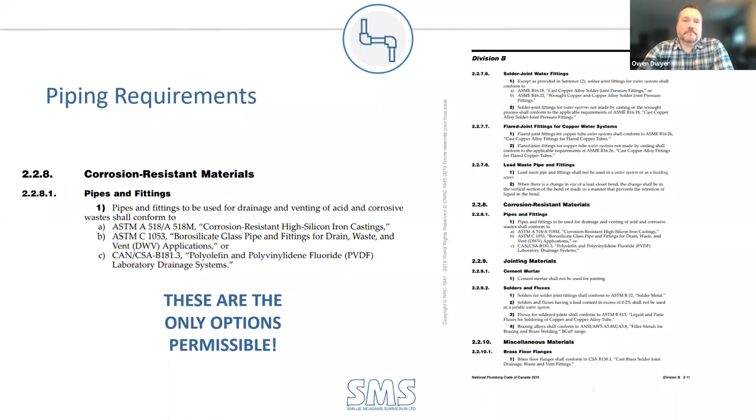So in the previous slide, when it talks about pipe for venting, for drainage and venting, this is part 2553 in the same discussion. Venting for drain piping or dilution tanks conveying corrosive waste shall - again, means must - extend independently and terminate in outside air. See Article 2577 for sizing, which I'll go to in the next slide. I'm just touching base on venting because it's important to remember that it's not only the piping on the drain side, but also the venting. It's very specific because if corrosive vapors condense back in through the vent piping, it's going to turn back into a corrosive liquid.

So the section points to the separation of the corrosive waste and venting from the sanitary. This is the 2577 portion where it talks specifically to the second point here: the size of every vent pipe for a sewage sump or dilution tank shall be not less than 2 inches, but not need to be greater than 4. That's taken from the code section to the right.

Essentially what that means, normally speaking, venting of any system is typically one trade size less than the maximum size of the piping system. But in this case, for the venting of a dilution or neutralization tank, it should not be less than 2 inch, but need not be greater than 4.

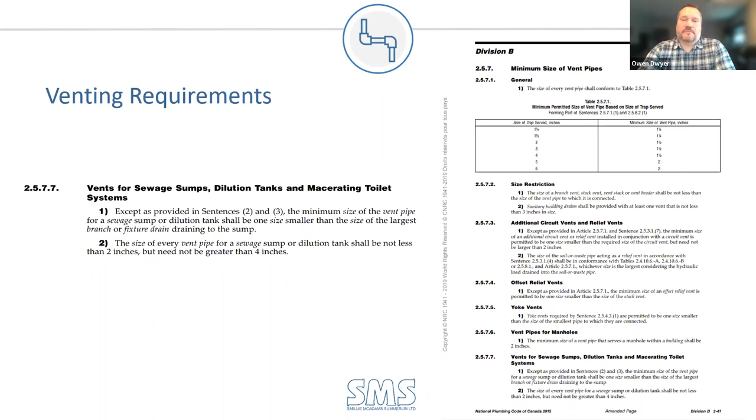So that's kind of the nuts and bolts of why we're going to talk about this today. As you see from the first, 2281 of the national code talks about A, B, and C. A was the Duriron or high silicon iron casting. B was the borosilicate glass, and C was the plastic.

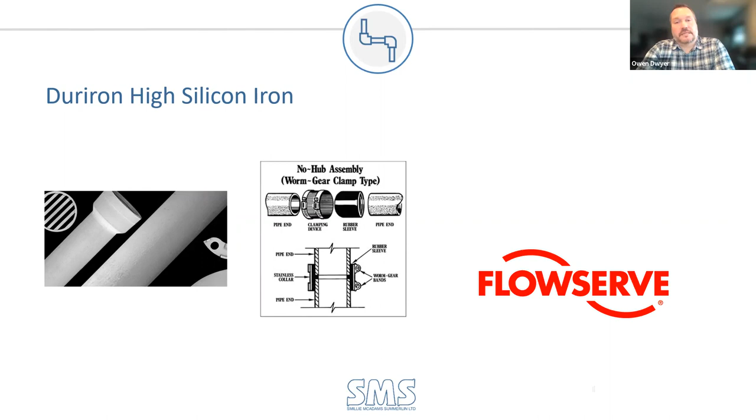So I'm going to start with the high silicon iron casting. It is classified as a non-combustible pipe. For those of you in attendance who have been around in the industry as long as I have or longer, you may be familiar with the name Duriron. It was manufactured by Flowserve, out of, I believe, New Jersey or New Hampshire, somewhere in the eastern part of the U.S. It was a no-hub style system that went together using mechanical type connections with a kind of Teflon coated rubberized fitting with a stainless steel jacket, etc., that you could see in the image there.

But it's discontinued, so it hasn't been amended or removed from the code. For any of you involved with code changes, it's not a quick process. So hopefully in iterations of the code to follow, the Duriron reference will be removed. As of April 2016, we were contacted by Flowserve saying they were going to discontinue it. But as you can see in the image there, like old dinosaur bones, every once in a while a backhoe will bust into a piece of Duriron, and people are scrambling to find out what to do and how to transition. But it was the inception product for corrosive waste almost 100 years ago.

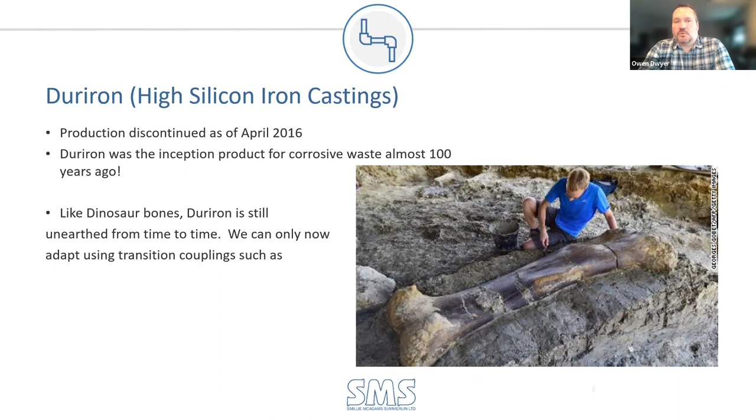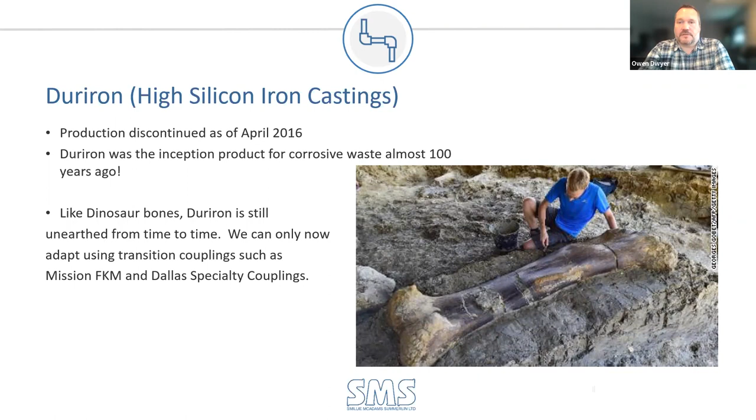So basically it was your standard cast iron with an additional ingredient of silica sand, which is the high silicon iron casting. It was very heavy, very difficult to deal with. And from time to time, if it is unearthed, all we can do at this point, since it's been discontinued, is to adapt or transition using various mission couplings, for example, or Dallas specialty couplings. You don't want to use a standard rubber like a Fernco or a standard MJ with standard rubber. It has to be specific and suitable for the purposes of corrosive waste drainage.

So I don't want to talk too much about Duriron because it doesn't exist anymore, but you will see it in the code, or again in your travels, if you have a job site where you've specified plastics or other material for corrosive waste and you unearth those Duriron dinosaur bones, you need to transition.

Borosilicate glass is also classified as non-combustible, and the reason I'm pointing out non-combustible will make sense in later slides. If you think of a laboratory environment, most of the vessels and things that carry chemicals are made of borosilicate glass - the flasks, the beakers, all the parts and pieces you find in a laboratory. That glass isn't the same as what you'd find in your kitchen cupboard. It's not thin glass like a wine glass. It is a very specialized glass - the borosilicate, again that silica sand, gives it durability and chemical resistance. It's non-combustible, similar to copper, cast iron, etc.

It has no requirements for meeting flame and smoke in the building code because it's classified as non-combustible. It is made by skilled tradespeople. Unlike something that would come out of a mold, glass is made by skilled tradespeople where they would take a small section of glass and, using a torch and a jig, make a small section of pipe into a 90, whatever elbow, U-bends, etc. So it's not a mass-produced injected product. It is the most expensive of the options for corrosive waste, and some of that is due to the fact that it's all made by hand.

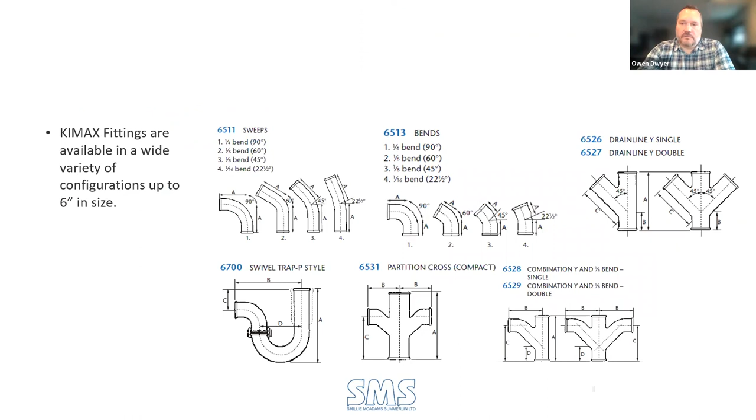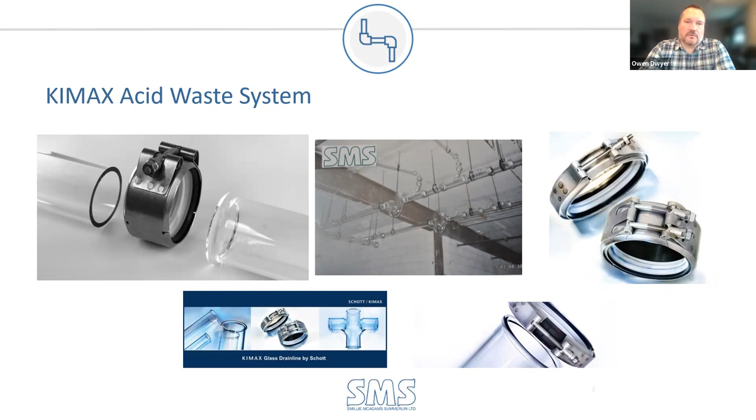So a glass piece of pipe has beads on the end. I'll go to a previous slide here - you can see that all the fittings have a flare or a bead on them. One more slide: you can see on the left-hand side a piece that's cut, that's a cut piece of glass that's plain end. On the right-hand side, you'll see a piece of glass that has the factory flare, or the bead, as it's referred to. So you have a piece of pipe that has a bead on both ends, a fitting that has a bead on both ends. But when you cut your piece of pipe, now you're left with one end that's beaded and one end that's plain - hence the terms for how you join the pipe and fittings together.

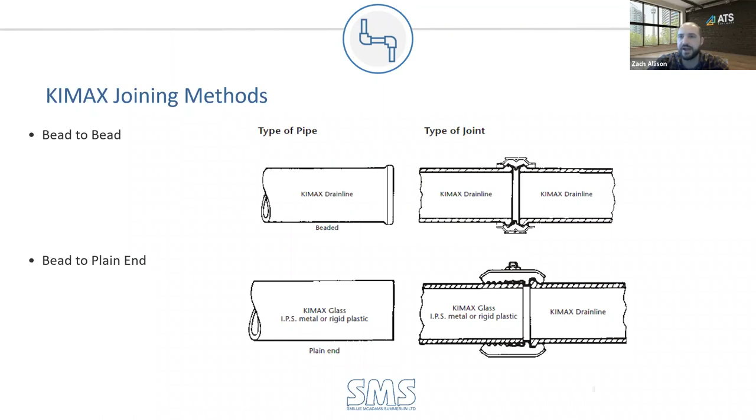Just a note on the beads and plain ends: glass is made to IPS dimensions - iron pipe size - which means it's suitable for connections to plastics that are iron pipe size, which is the next material we're going to get into. Basically it's a DWV or Schedule 40 type of iron pipe size dimension, so that often means you're getting the same flow rate for an inch, a 2-inch glass from Kimax as you would from the IPS standard. The ODs match essentially, so you don't have to have any special transition - a bead to plain coupling is often used as that transition to a dissimilar material.

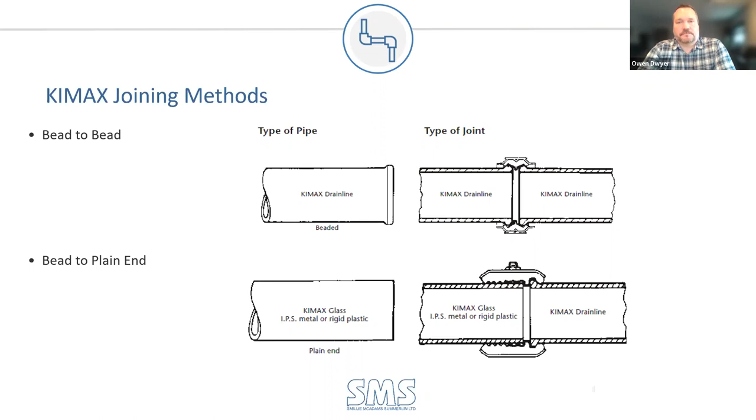So jumping into the C of that A, B, and C is the plastics. If you recall, the CSA requirement is B181.3, and what that covers is the polyolefins, which are your polypropylenes and your PVDFs. And they, being plastic, are combustible. In our world of code compliance - drawing on my previous tenure with IPEX - there is a flame spread rating requirement and a smoke development requirement, depending on the type of occupancy of the building, return air plenums, et cetera: flame spread of less than 25, smoke development of less than 50, et cetera. So it still comes into play for corrosive waste.

Back in the mid 1990s, there was only duriron and glass as options for corrosive waste. I believe it was in '96 or '97 that plastics were introduced into the market, specifically polypropylene first.

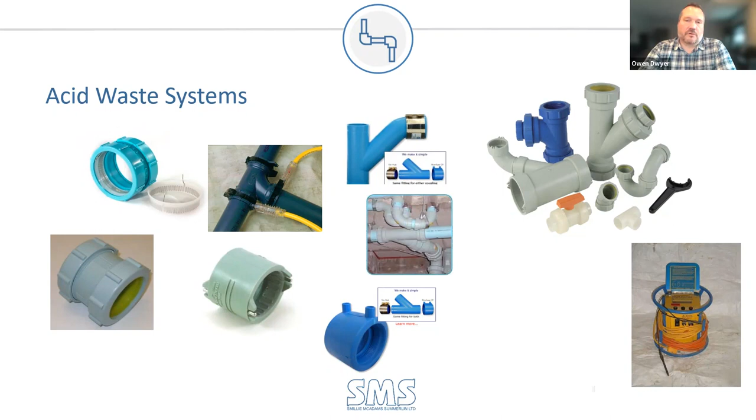For an acid waste system, when we talk about polypropylenes and PVDF, you'll see references to flame retardant polypropylene, non-flame retardant polypropylene, and the PVDF material. Some manufacturers have variations in color -- you'll hear brown line, blue line, Enfield, lab line, plenum line, et cetera.

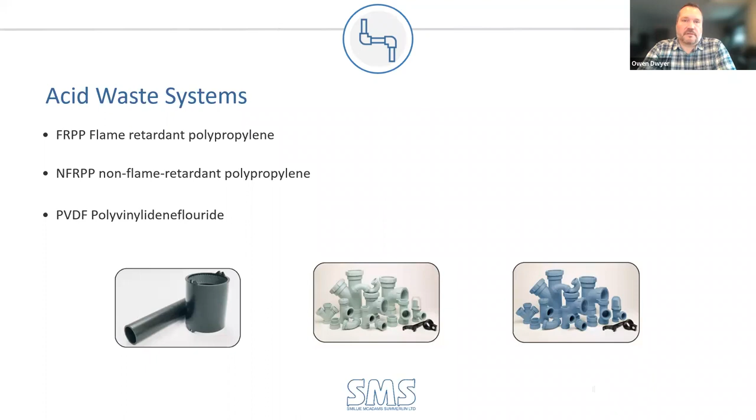Regardless of those names or nomenclature, it comes down to this requirement: polypropylene is permitted in the building if it's sprinklered. You can't put it in a plenum because it doesn't meet flame and smoke requirements. PVDF meets flame and smoke, and it can be used in lieu of polypropylene if it's a non-sprinklered building. These are the things you have to keep in mind when specifying and looking at corrosive waste on the plastic side.

Electrofusion and mechanical joint -- because polypropylene is inherently inert to most chemicals, it's not susceptible to softening and joining with solvent cements. So like PVC DWV, or CPVC, or ABS, all those other thermoplastics can be joined using chemical welding or socket and spigot chemical joining. Polypropylene and PVDF cannot be joined using chemicals because, again, of their inherent nature of being inert to those chemicals.

You just think of it like purchasing a chemical, for example bleach -- it's going to be sold in a polyethylene or polypropylene, a polyolefin type of container. The reason for that is that it's inert to that chemical.

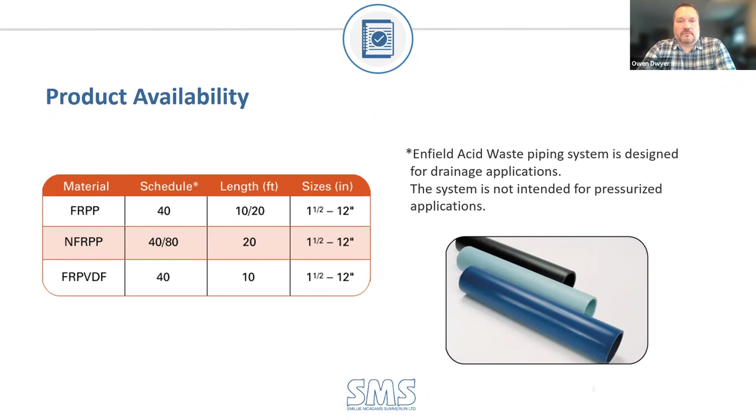So a winded way of saying you can either join polypropylene by way of fusion or by way of mechanical joint. And I want to reestablish that we're specifically talking DWV in this presentation. There are polypropylenes and PVDFs used for pressurized applications like pure water distribution, but I'm not talking about those, they're different beasts altogether. Polypropylene is generally available up to 12-inch for DWV here in North America. Some manufacturers claim up to 16-inch, but that's not something you're likely to find on the ground or readily available here.

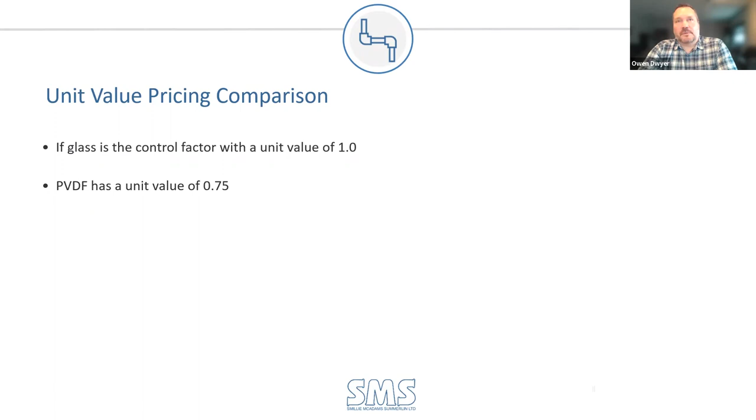Jumping into a unit value comparison. If glass is a control factor with a unit value of 1, for simple math, if you had a $1 million pipe and fitting takeoff value for a glass job, PVDF would have a unit value of 0.75 - about 25% less than glass, depending on the pipe and fitting configuration. Polypropylene is 0.35, almost a third the price of glass. You can see why those special provisions were made in the code, to allow for something that much lower in overall cost.

Bringing you back to the history, polypropylene was in the picture before PVDF, so polypropylene had a direct comparison to glass at that time. That $1 million school renovation had no other choice. Now with that special building provision, you're able to get a material that's a third the price. You can see why Duriron went the way of the dodo bird - it's 3.5 times that of glass, so 10 times more than the polypropylene option introduced in the late 90s. It just makes sense as to why that's now no longer available.

So general code requirements for corrosive waste. We talked about suitable for the purpose. I bring this to your attention, the 2211, specifically the second point: materials and equipment used in a drainage system where excessively corrosive wastes are present shall be suitable for the purpose.

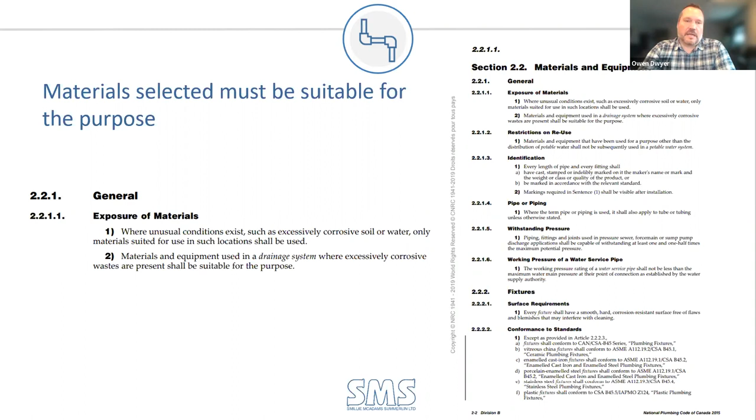This goes back to when I said, when you're doing a transition and you unearth the dinosaur bones of Duriron, don't just throw a standard rubber Fernco coupling on there and bury it and expect it to last. There are materials designed for those transitions, made and intended to be specific and suitable for the purpose. Because this is highly corrosive material, you want to make sure all your parts and pieces being used are going to stand the test of time and be suitable for the application at hand.

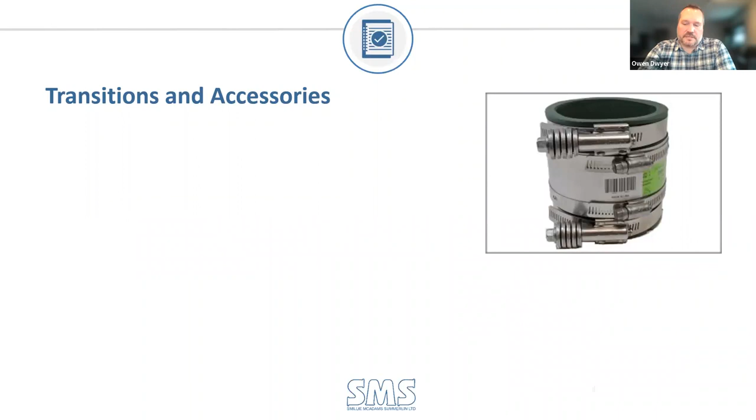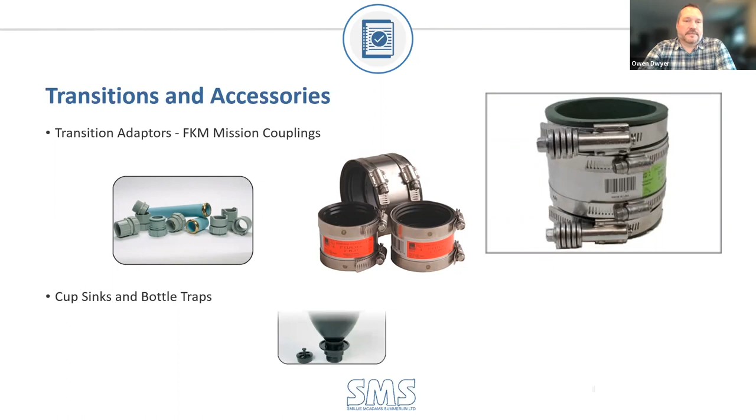Transition accessories - there's an image of a Dallas specialty coupling, FKM mission couplings there in the center, and different transition adapters - male, female fittings, bottle traps, cup sinks, etc. There's a whole slew of variations with respect to transitions and accessories, but just keep in mind it has to be suitable for the purpose.

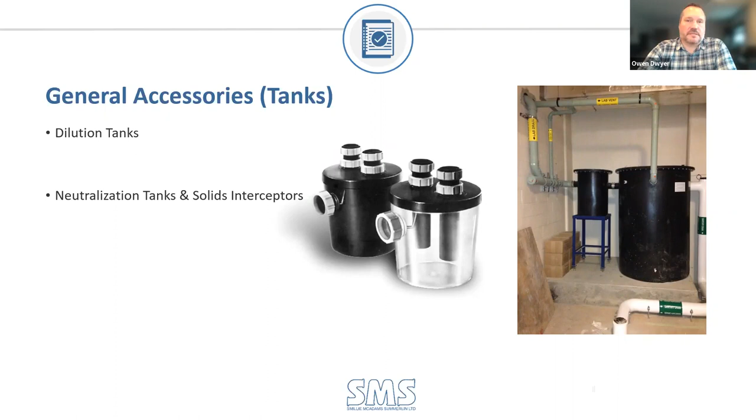Dilution tanks, neutralizations, and solids interceptors are all a part of it. On the image on the right-hand side, you have your corrosive waste piping coming into an interceptor that sits on a stand. You have your neutralization tank that's vented at the 6 o'clock position facing us. Downstream, you can see what looks to be cast iron that's been insulated with an insulation jacket. Downstream of the neutralizer, you can use traditional materials - PVC, cast iron, copper, whatever's suitable.

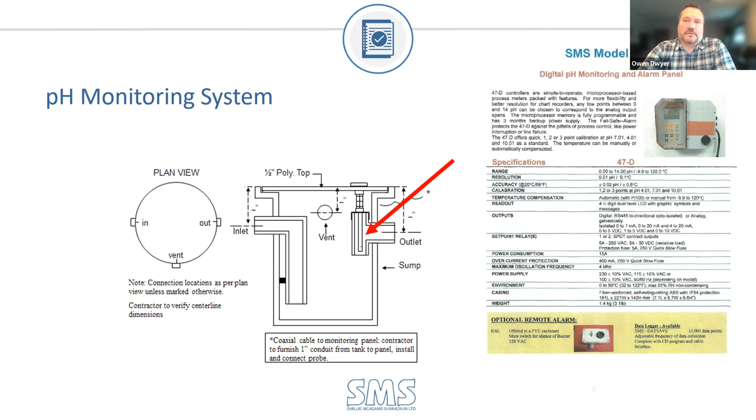A pH monitor is also a good thing. I'm going to go into neutralization in the next couple slides, but this is part of the accessories to point out - pH monitoring systems.

Where are we going to see these types of applications? I mentioned high schools, hospitals and universities, but you're also looking at industrial applications. If you have chemicals in an industrial application, be it a photo lab or a plating company, pharmaceutical production facility like an Apotex or GlaxoSmithKline, and food and beverage. Food and beverage comes into play predominantly with respect to cleaning - they will use either acids or caustics to sanitize and clean their equipment prior to starting up the next batch, or in between shifts, etc.

One of the applications we don't show on there, but it comes up regularly in our discussions, is like the battery replacement for, say, a forklift or anything like that. Yep, that one's come up pretty regularly as well, and that could be a warehouse, all sorts of different applications.

That's an excellent point, Zach. Essentially what Zach is referring to is any large facility that's got large forklift batteries. You either have a facility with one or two forklifts, which may or may not warrant what we're discussing here. But if you've got a Lowe's, a Loblaws, or a Sobeys, a massive distribution warehouse with forklifts that have massive batteries, you'll have a battery washing station and all of that.

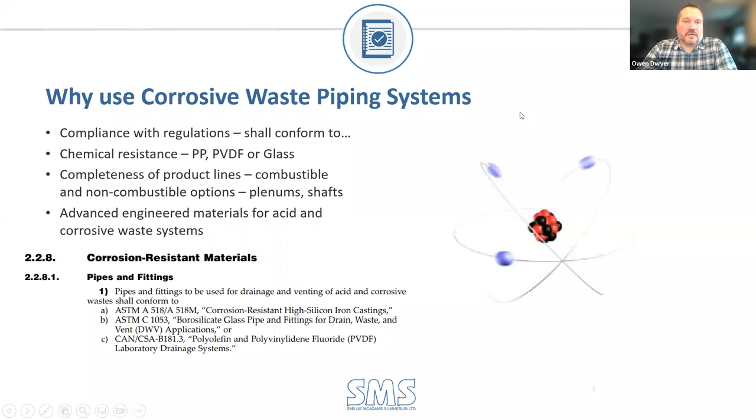So Zach, if there's no questions on the piping right now, I'll jump into the neutralization portion of the presentation.

Yeah, we can pause for a second. I haven't seen many questions coming in. I think that's because it's relatively straightforward, right? The discussion so far is just showing this is the code, these are the important aspects of it, and these are some of the options you have to meet it. But even referencing back to how you would suggest an engineer write a spec, it's more of a code-based spec versus a product-based spec. I think that's because specifying the codes that are referred to, they have different CSA ratings, like you mentioned, and those are going to be the more important parts to meet. I think it's good to point that out, because in the second half here we're going to have a differentiation. So I haven't seen anything come in yet, so I guess we'll let you dive into the neutralization, because I think seeing that juxtaposition is going to be interesting.

Yeah, and as you mentioned, the piping side of it is pretty straightforward. So you've got a sprinkler provision for polypropylene. PVDF is the plastic that's for flame and smoke ratings in lieu of not having a sprinklered building. And then you have your glass, which is your non-combustible option. Keeping in mind that it's the most expensive, but we'll jump into neutralization.

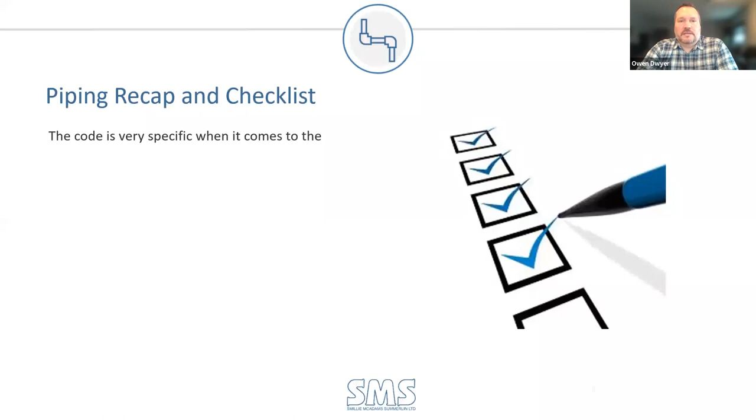In this process, there will be a quick recap. The code, again, is very specific when it comes to requirements for corrosive waste pipe within the building envelope. The 2281 talks about the A, B, and C of the pipe, the combustible pipe restrictions, which was the 31516 with the sprinklered building. The 3643 I didn't talk about, but that's your general plenum requirement. That would trump the sprinkler thing.

If you have any product in a plenum, it must meet the 25/50 flame and smoke rating, and your venting requirements in 2553. That talks about extending independently and terminating in outside air, as well as having a minimum vent size of 2 inch, but need not be greater than 4, with regards to a neutralization system.

And what piping also takes into consideration when there's an inspector in the building - for example, vertical shafts - it talks about fire stopping, it talks about slope, etc. So this is very, very specific. There's a lot of attention spent on the piping side within the building.

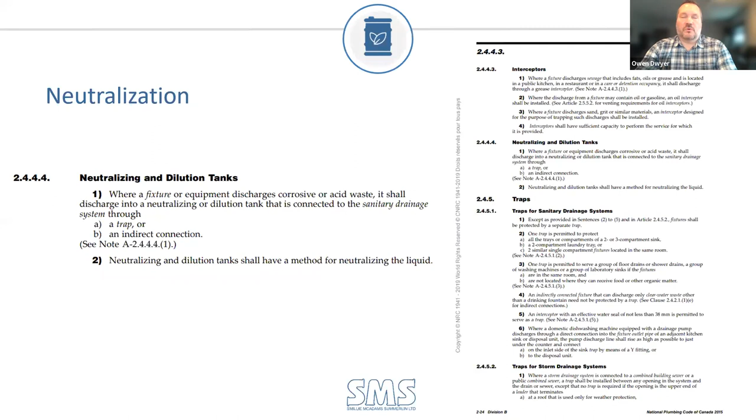However, when it comes to neutralization, this is the part that I want everybody to understand. We know that you're collecting all of this nasty stuff within the building, because there's special provisions for special piping that says thou shall use either A, B, or C.

Now you're collecting all of this stuff. What do I do with it? You just can't put it into the sanitary system.

So in 2444, it says where a fixture or equipment discharges corrosive or acid waste, it shall discharge into a neutralization or dilution tank that's connected to the sanitary drainage system through a trap or indirect connection. But most importantly, the second part here, neutralization and dilution tanks shall have a method for neutralizing the liquid, period, full stop.

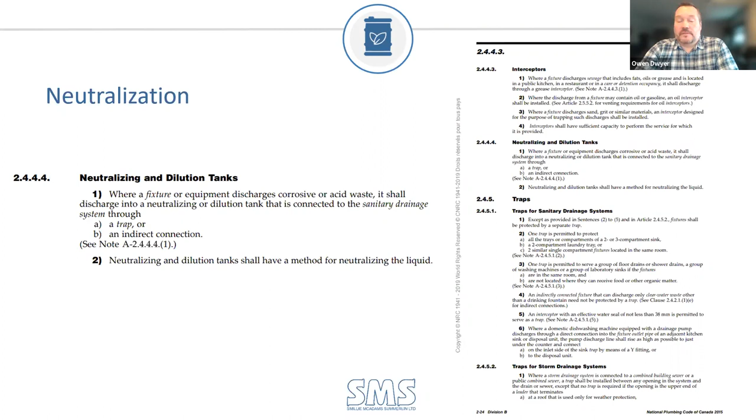It doesn't tell you how big it is. It doesn't tell you what it looks like. This is an engineered design system. So you as the designer have to take into consideration fixture units, location, is it above ground or below ground?

There's a lot of things that go into the planning and designing of a neutralization system, whereas the piping kind of takes care of itself as long as you pick the one that's most suitable for the building. This is coming down to what's most appropriate and sizing it for the actual incoming effluent.

Most municipalities will have it spelled out right in their sewer use bylaw, saying it's not permissible to discharge anything lower than a pH of 6 or greater than a pH of 11. So that's your window. If you are outside of that permissible window, you're corrosive. So this is where neutralization comes into play.

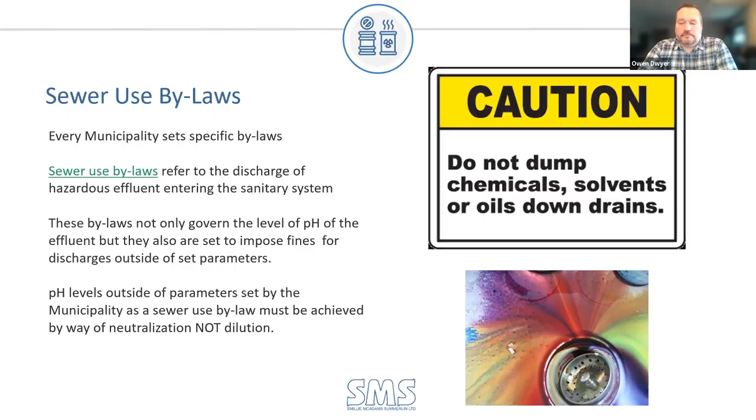As I mentioned in the code section talking about neutralization, they also mention the word dilution, and they seem to interchange those two terms. I want to be very specific and give you a little background on the main differences. Dilution is not the solution to pollution. And I say that because my education is in biology research.

I used to have a professor that when we were done our experiments, we would essentially turn the cold water tap on in the lab. No matter what we had in our beaker, we just poured it down the sink and left the water on for 5 minutes. That's the term he used: the solution to pollution is dilution. So I shake my head thinking back now, if I only knew. But anyhow...

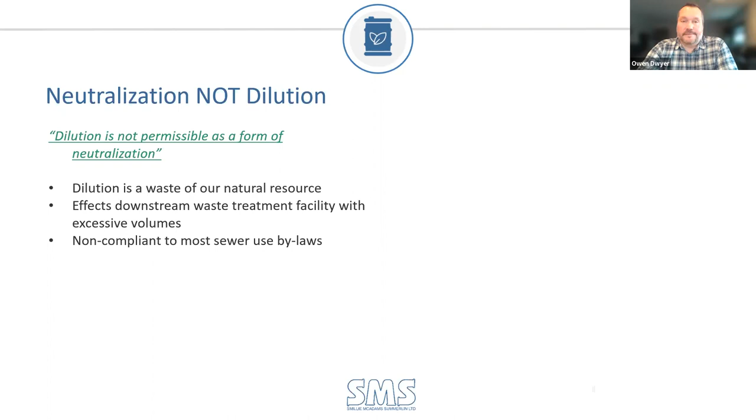It's in parentheses because that is a hyperlink, and I have not had success in presentations clicking hyperlinks, so I'm going to just tell you most municipalities have that verbiage in their bylaw that says don't use water as a permissible form of neutralization, because it's a waste of natural resources. It affects the downstream waste facility with excessive volume, and it's non-compliant, as I mentioned, to most sewer use bylaws.

And it's that kind of NIMBYism approach to the problem, where say you have a pH monitor that says, hey, we're in an alarm situation where we have a pH of 5, and you turn a bunch of water on. You don't actually treat that water. You're flushing that pH 5 out of your building and into the municipal system. So it's not appropriate to think of dilution as a form of neutralization.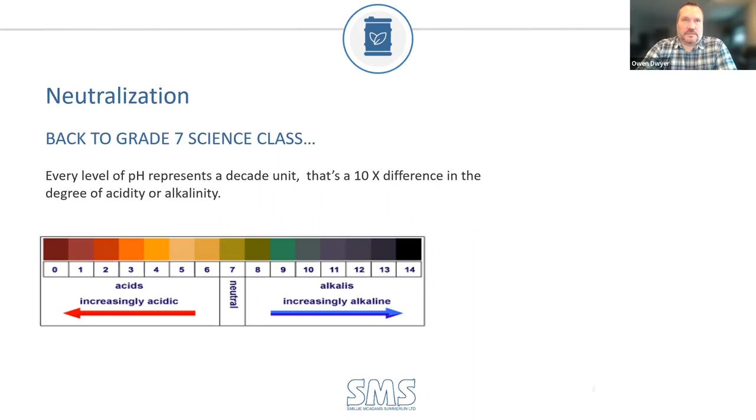So if I can get you all to jump back in time to grade 7 science class, you're familiar with this chart. Every pH level represents what's called a decade unit. There's a 10 times difference in the degree of alkalinity or acidity in each of those numbers. So as an example, a pH of 6 is 10 times more acidic than a pH of 7, and the difference between a pH of 5 and a pH of 7 is 100 times. So that jump, or that decade unit, is what you have to wrap your head around.

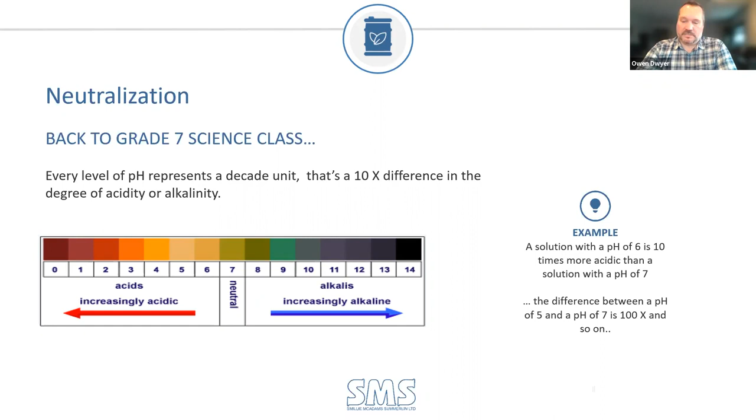Because if you think in terms of dilution, what that means is, if I had a 1 liter beaker of acid with a pH of 1 — say sulfuric acid or muriatic acid or whatever strong acid — and I wanted to neutralize that acid to a pH of 7 by way of dilution, I would have to mix that 1 liter of acid with 1 million liters, if you follow the amount of zeros, of clean fresh water to neutralize that 1 liter of acid.

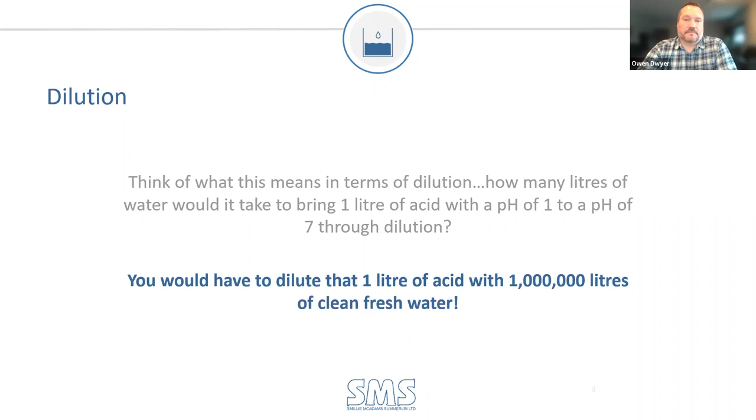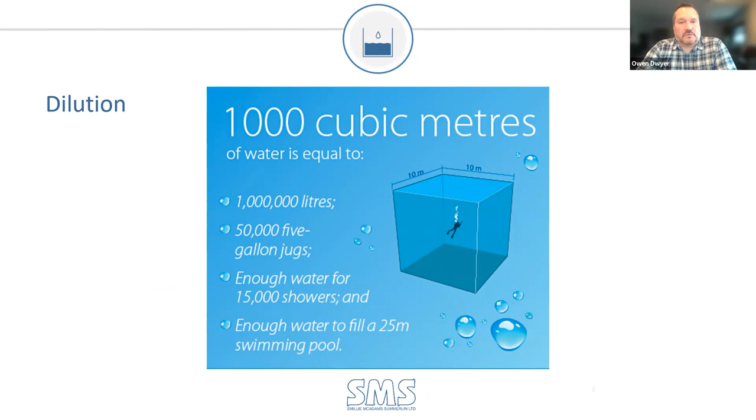So just think of what that means. That's 1 million liters, which is 50,000 5-gallon jugs, or enough water for 15,000 showers, enough water to fill a 25-meter swimming pool.

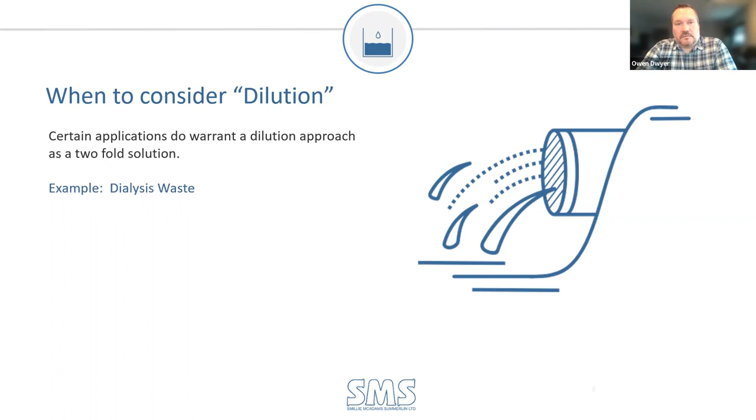So you don't think of dilution as a way of treating the incoming liquid. When you do want to consider dilution, it's very specific, and it warrants dilution for dialysis waste. If you're looking at a hospital that is predominantly focused on dialysis, you will have a corrosive environment. Dialysis waste is a concentrated uric acid, generally falling between 4.5 to 5.5. So it does require some treatment.

If, for example, your municipality has a limit of 5.5, you don't need to do anything with it. If your pH is 4.5, you may want to tie it into the last connection going out of the building and treat it by way of dilution, twofold.

One, because it's a viscous liquid. For those familiar with dialysis waste, it's quite viscous, almost like a latex paint, and it would absolutely be detrimental to a calcium carbonate limestone neutralization system, essentially pouring latex paint over the stone so the stone doesn't have contact with the liquid. I'll touch base on the calcium carbonate shortly. Just going to double check time here.

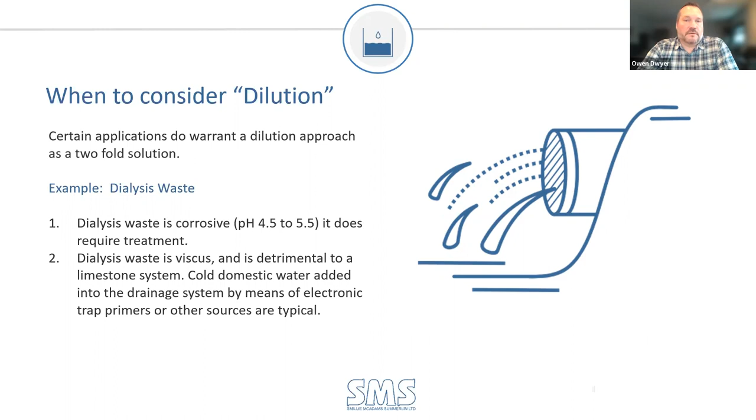So what we do is a dilution approach for dialysis waste. How we do that: we have either push button controllers that inject liquid into a tank, or you have a flushing floor rim type of scenario. But this is dilution for a very specific application, which is dialysis waste.

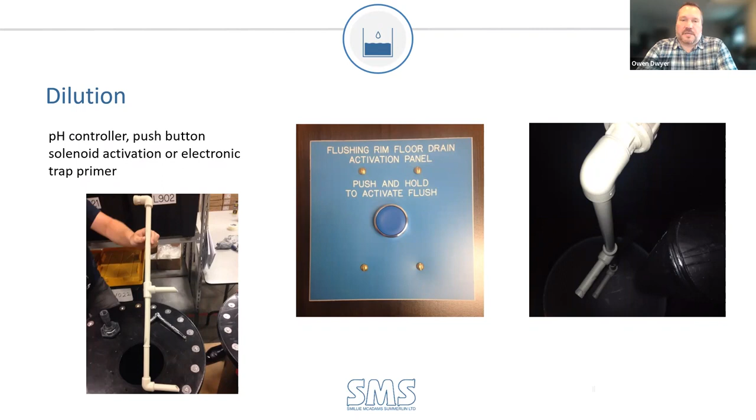So the proper and most common way of thinking of neutralization is either passive or active. A passive system is what you would typically see. It's limestone, and those systems are calculated based on a specific duration of time that the liquid has in contact with calcium carbonate limestone, which is an alkaline substance.

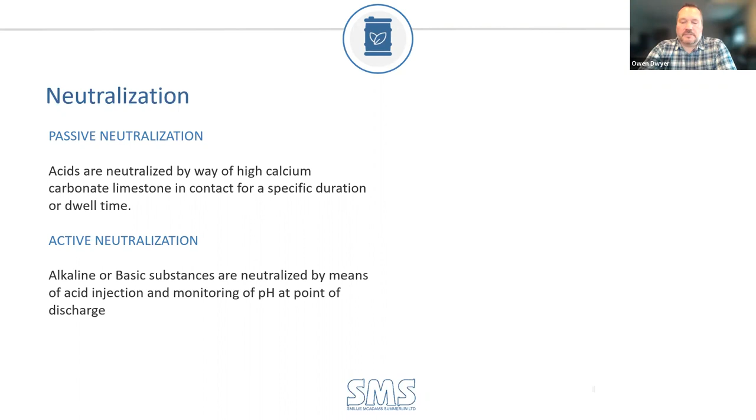And then you have an injection system, which, going back to science class, if you have an acid and you mix it with a base, you get neutral. If you have a base and you mix it with an acid, you get to the neutral side of it as well. So basically you're injecting an opposite to neutralize it prior to discharge.

This is your standard gravity flow system. As I pointed out in the previous slide, you have your interceptor, you have your vented neutralizer, and downstream on the right you can see that it's a cast iron connection downstream.

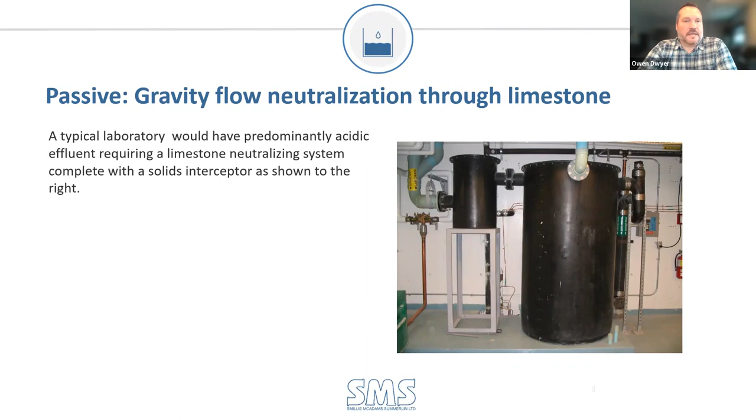So this is the meat and potatoes of neutralization. How do you size a passive neutralization system? The typical calculation and industry standard forever has been to use a minimum of 1 gallon per hour per fixture unit in your system.

So fixture units, very similar to when you're sizing water lines. Fixture unit counts are available through the National Building Code hydraulics load for fixtures in 2493. So counting up your fixture units, whether it's a number of sinks, your eye wash units, floor drains if they're connected to the neutralizer, emergency showers, if you've got glass washers in the laboratory, et cetera. All of those have an associated fixture unit.

This is a snippet of the 2493, of which here is a very typical example. So you have a lab with 20 lab sinks. A lab sink under that 2493 fixture unit load chart is equivalent to 1.5 fixture units per sink. Excuse me for a second.

This might have, for example, 3 4-inch floor drains. A 4-inch floor drain is 4 fixture units, times 3 of them you have 12, plus an emergency eye wash unit, et cetera, et cetera. So you add up all of your connected fixture units to your neutralizer, or that your neutralizer would encounter. In this example, we come up with the number 57.

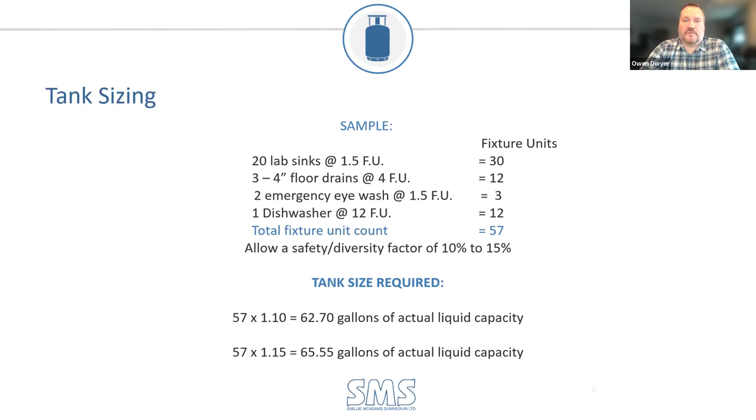Sometimes you design in phases, so maybe you want the neutralizer to be oversized for the first phase. It looks way too big for what you've got coming into it, but it makes sense when building phase 2 comes into play. So 57 times 1.1 or 1.15, you end up with 62.7 to 65.5 of actual liquid capacity. That's the important term: actual liquid capacity. So that's 65 gallons, that's functional.

What is your functional capacity? So I use this image here: there's a hole in my bucket.

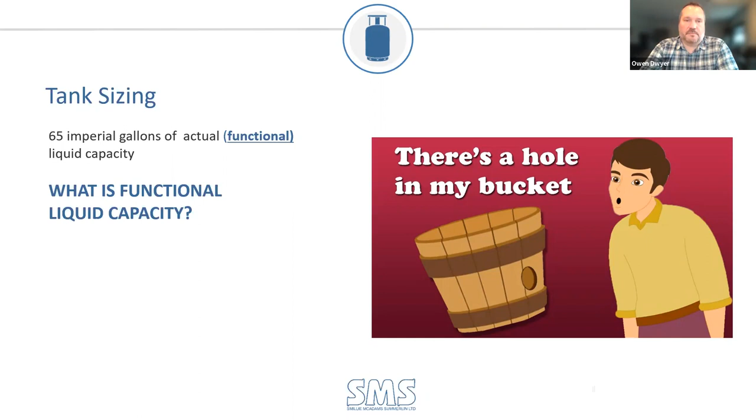My analogy is you have a 5-gallon Home Depot bucket. It will hold 5 gallons of liquid. But if you fill it up with rocks and put a hole in it a third of the way down for your inlet, outlet, and vent, you can't hold 5 gallons anymore. So don't refer to it as a 5-gallon bucket. Refer to it as what it's functionally capable of handling - how much liquid will actually be in that bucket once you add the stone and your inlets and outlets.

So for example, our 57 gallons times 1.1 or 1.15 brings us into an AN65. An AN is just a term for an acid neutralizer, and the 65 is a term for its functional capacity. You can see 3 columns over that it's 36 by 48. It's highlighted in blue as its functional capacity, but in white in the first column to the right, it says 142. So that's that 5-gallon bucket analogy.

So why specify 142-gallon sump? It's not ever going to see 142 gallons. So specify and think of it as what it is that you're actually wanting to hold, because you've just completed a fixture unit calculation. The most important thing is detail when it comes to specifying neutralization.

Put the dimensions in there. So pi r squared h, 36 by 48. You have your volume of a cylinder. By the time you do your conversions, that's going to give you 142 gallons empty, or 65 as a functional capacity.

So the functional capacity, again, as I mentioned, you have all of this limestone that's in your system, and it displaces the liquid. Typical rule of thumb is to use a 50% displacement, and that's based on a 1 to 3 inch size rock versus something smaller. You're not looking at something that's pebble size, you're looking at actual stones.

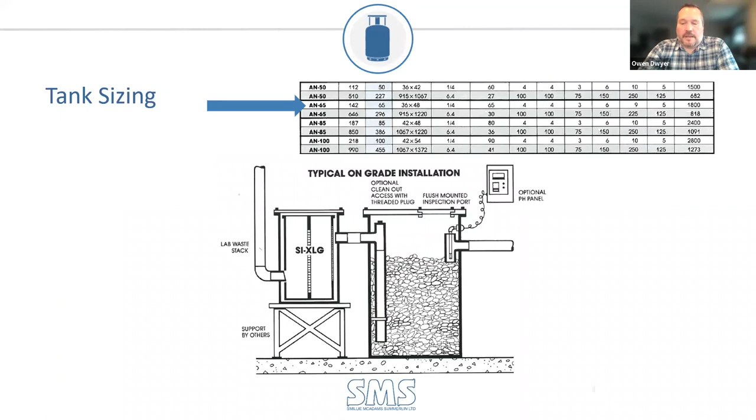As long as you have the appropriate dwell time for that corrosive liquid coming in, you're fine.

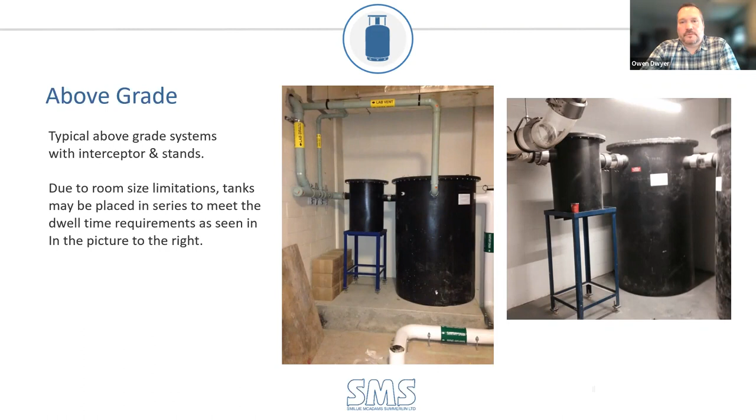So that actually ties into a question that just got brought up in chat, because you mentioned the dwell time there. So I guess just to reiterate, we had talked about how the fixture units lead to your total gallon per hour flow time. That say 65 gallon per hour using our example means that you want a 1 hour contact time. So 65 gallons of functional storage is what we're looking for.

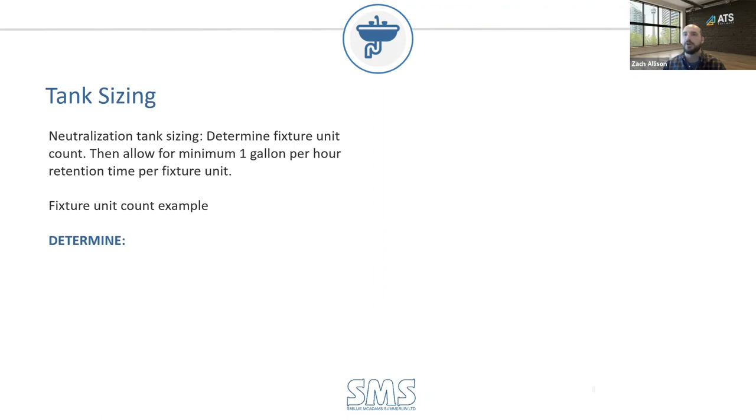Right. So with the example that you gave there, if the max size that fit through your doorway was, use round numbers, a 100-gallon tank - 100 gallons of functional capacity - but you had 200 gallons per hour, you could use 2 tanks. That's what you're saying, correct? Correct, yep.

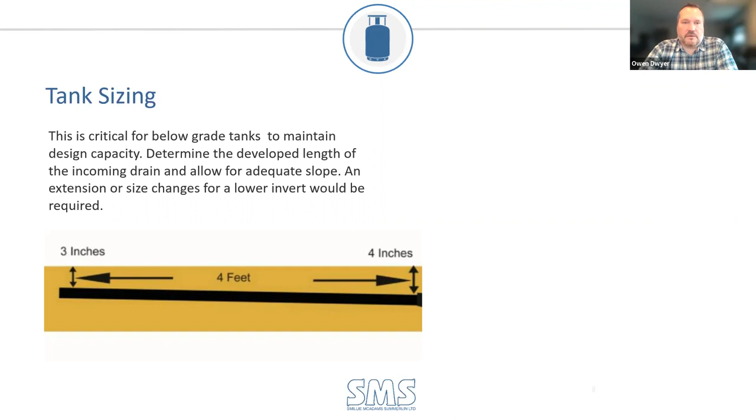So you have your above grade or below grade systems. With the below grade system, you want to maintain that functional capacity, but also take into consideration your developed length. As you go farther away, you have to comply with the slope of your piping. For example, if the tank was in this room but had to move 100 feet away, you'd have to reevaluate and reconsider that tank's location and sizing, because you have to take into consideration your inverts. And don't forget to consider door openings for existing buildings.

So that covers the passive. Passive neutralization is very specific for acids only, so predominantly acid effluent. When you get into active injection, that's for something predominantly alkaline, or you might see both alkaline and acid. Here's a very rudimentary picture.

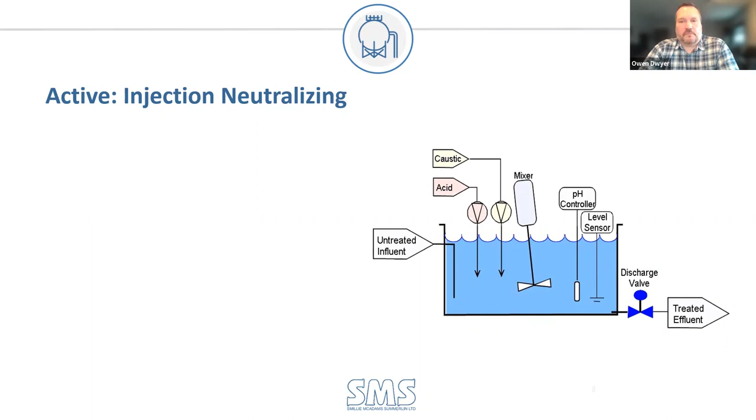You've got an untreated influent coming in, dosing pumps of either acid or caustic being mixed with the mixer, your pH controller, level sensors, etc., and a treated effluent that goes out of the building.

So how do we size those tanks? The gravity flow is based on fixture units, estimated with maximum flow capacity. You need to know your estimated GPM flow rate, and we take that number and multiply it by 10 or 15. ASPE likes to use 10, but we at SMS have used 15 over the years, because it gives you a little bit more volume, but also allows for a slightly lower reagent concentration as far as the injection reagent.

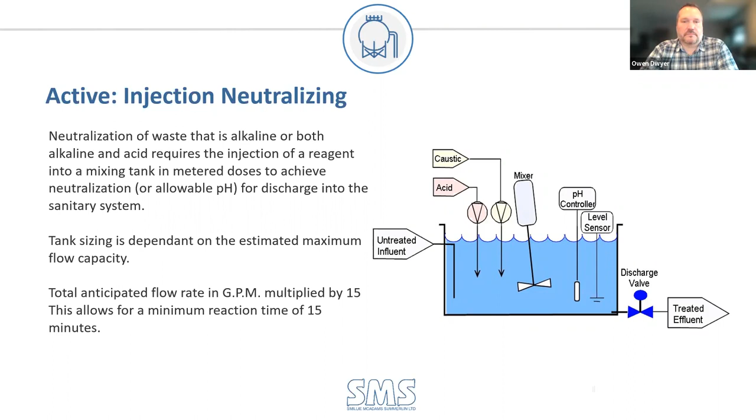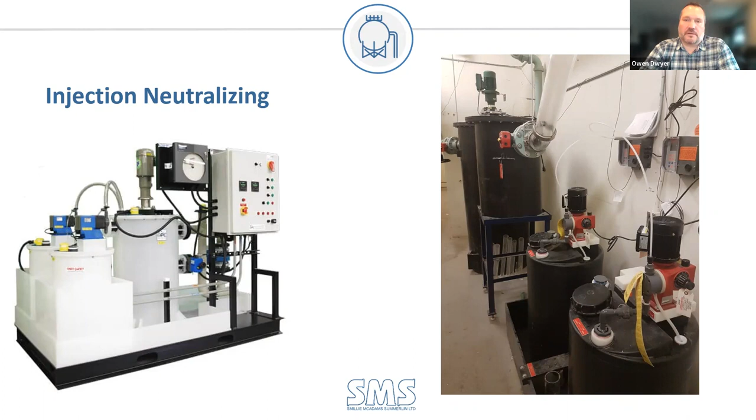Different injection neutralization systems: you have the skid type on the left, where all the components are the same - a controller, a dosing pump, a mixer, tanks, spill trays, etc. The one on the right, I believe, was Mount Sinai. You'll see the dosing tanks in black on the bottom, the dosing pumps and pH controllers on the wall, and downstream you can see the agitator on top of the tank in the back.

Interceptors are very important for these systems - you don't want any solids getting in. This just gives you an idea of what an injection system would look like. These are all engineered systems based on an anticipated flow rate.

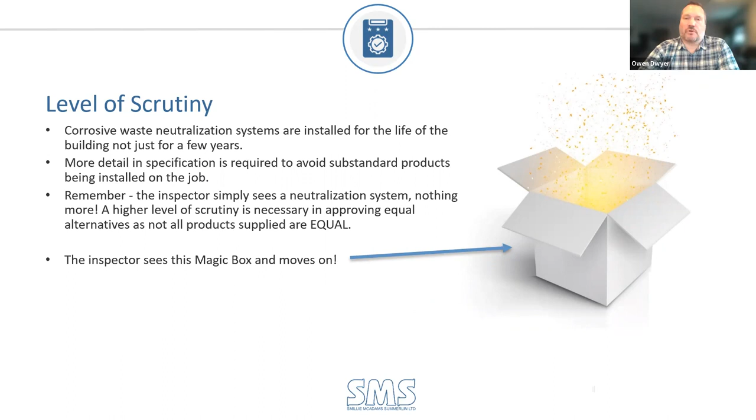It's up to us in this industry to scrutinize submitted equal alternates, because ultimately the inspector sees the magic box. They know it's supposed to be a neutralizer, but they have no real information or background as to what it's supposed to look like or how big it's supposed to be. They're not going to scrutinize it based on its construction qualities, etc. So that's up to us.

That level of scrutiny harkens back to the beginning of the neutralization section, where we talked about how the two pieces in the code are that it must be neutralized and the neutralizer must neutralize. So your particular spec as the engineer is what you have to make sure any alternates are meeting. This is one of those pieces where there's not a lot of options that are all truly equal. Someone could submit a garbage can full of limestone and call that equal to an engineered product, and it's up to the engineer to properly review and spend time on this engineered equipment.

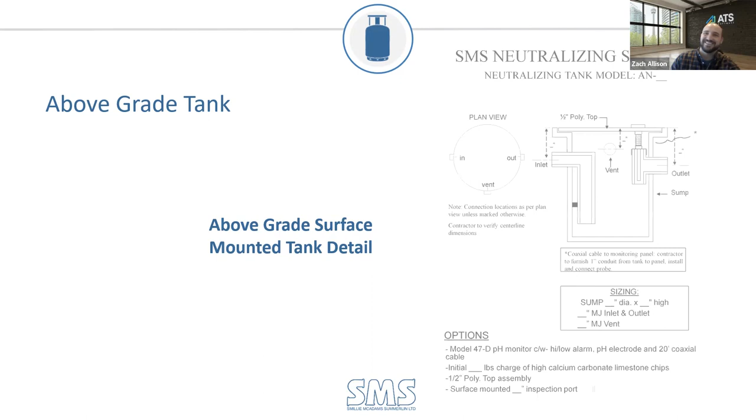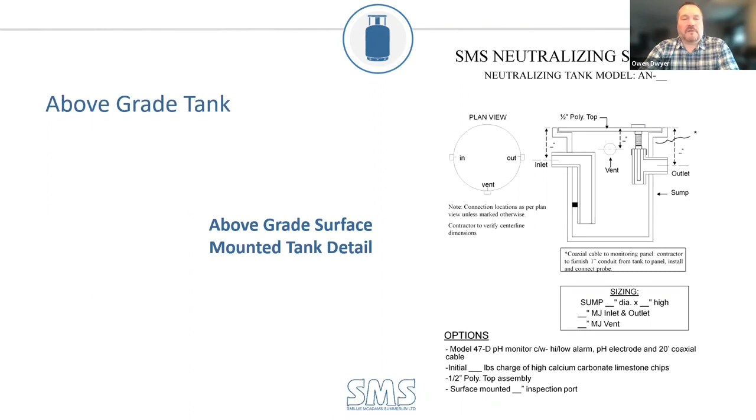When a manufacturer of a rotationally molded tank sells a tank, they don't know if it's collecting rainwater, storing dog food, or shipping bird seed. They have no idea. They've made a rotationally molded tank, it comes with the lid - here you go, off you go. When we receive a tank from a supplier, we modify that tank for the purpose at hand, which is acid waste neutralization.

So with the above grade tank, you have to cut the top off of it, and make a gasketed connection using stainless steel bolts, etc. There's a little line drawing of what you're looking at.

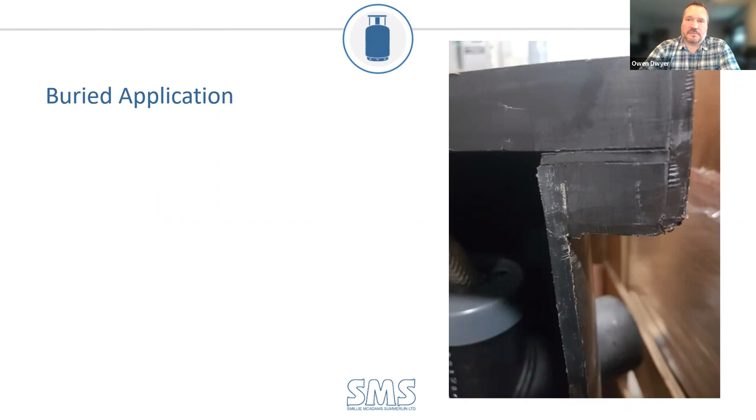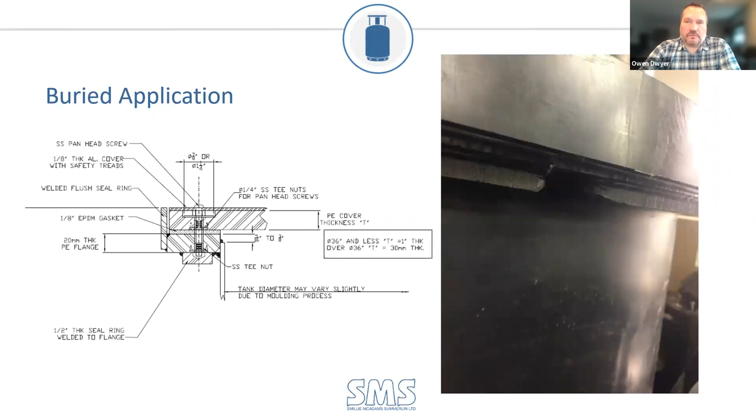And then you have a below grade buried application, so you're going to bury a tank below ground. You want to beef it up because people are going to possibly walk on it. So you can see this insert has the same gasket, but now that top of the tank is beefier. And there's an inset—what do you do with the receiving nut on the bottom? In this case, it's welded right into the bottom of that tank. And again, these are all things it's designed and built for that specific application, not to hold bird seed, etc.

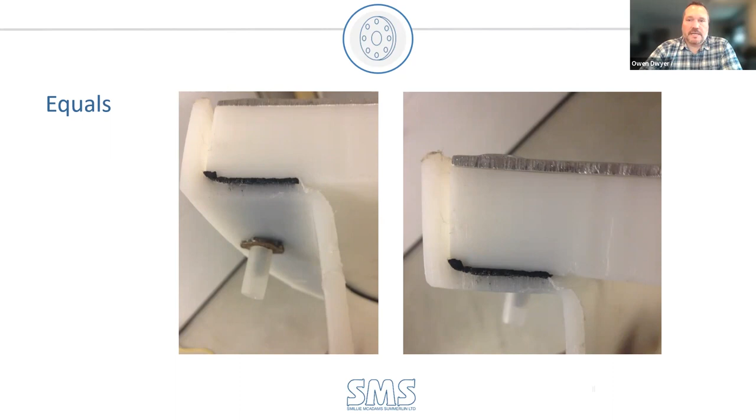And as Zach pointed out, will a garbage can full of limestone neutralize? Yes, but in a $500 million hospital application, you don't want to get into that.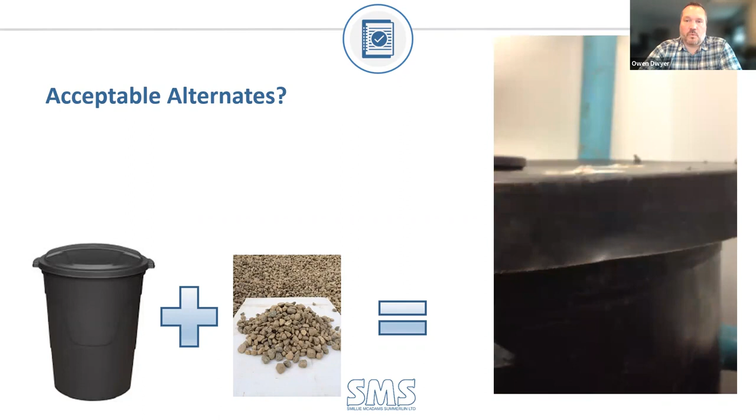I'm just going to play this video here. This is the manufactured tank as supplied with the flimsy lid. Again, they don't know if you're collecting rainwater or what, but this was turned into a neutralizer and interceptor. But what they don't have is a seal. So this is copper pipe in this small mechanical room housing the neutralization and sediment interceptor, where the vapors were escaping the tank the whole time.

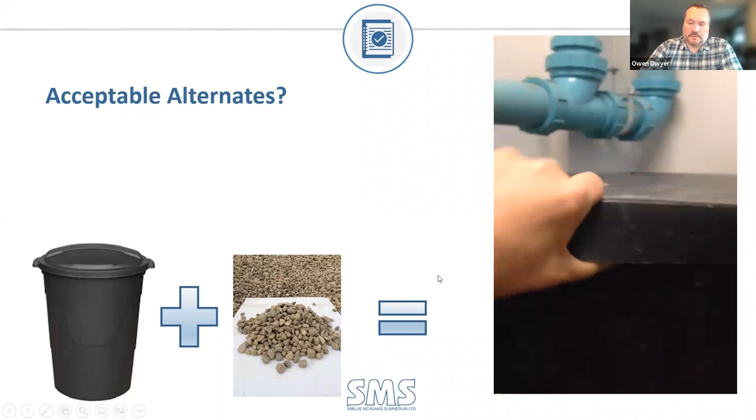I'll just play that again—you can see how flimsy the lid is. Why would you want to try to bolt that lid down to create a seal? There's not enough substance to that lid to create a proper seal. So that's Zach's analogy, and I used that before: if you don't scrutinize it, the contractor is going to want to save himself or herself $1,000 if they can, by putting in a garbage can and a bunch of rocks and calling it a neutralizer. So they're not all created equal.

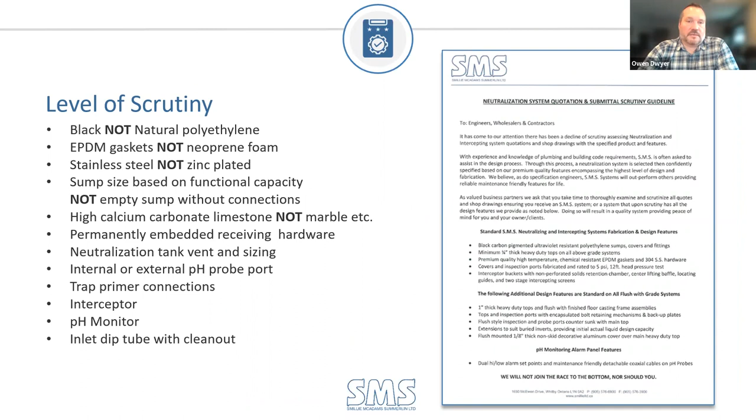You're doing a design, you're creating something that is going to be either buried in place in the ground—it's a permanent embedded receiving hardware, the neutralization tank vent sizing. Does it have a pH system on it, etc.? So these are things that you need to make sure are there before you accept alternates for these types of systems.

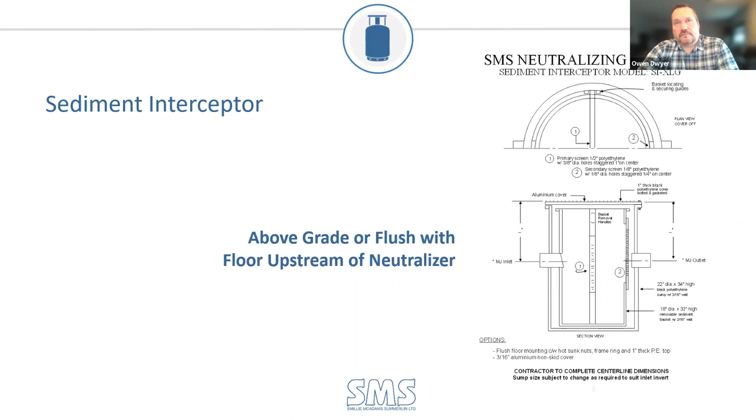So that's neutralization—I'm going to briefly touch on interceptors. Interceptors are not part of the code, but what they do is protect the neutralizer from having any particulates cramming into the bottom of that neutralizer's dip tube. So you can see here on the right-hand side, if you didn't have this liquid being forced to the bottom of the stone, you'd have what's called laminar flow—it's just going to go in, go out. So every neutralizer has to have this dip tube.

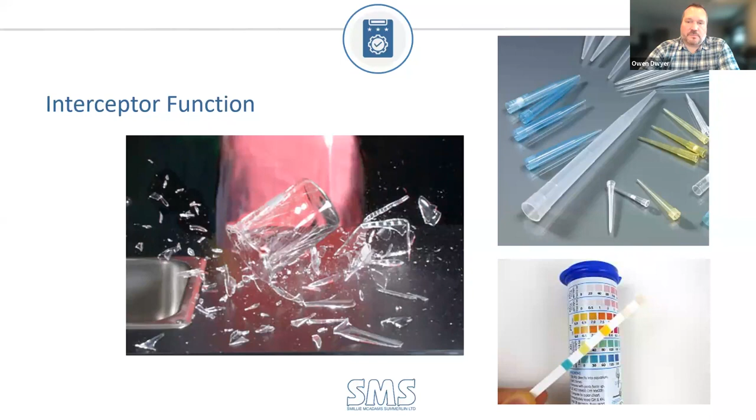If you didn't have the interceptor upstream and there's broken glass or whatever ending up down in here, you're going to have GFL Environmental come in and remove 1,000 pounds of stone just to clear a small clog in a 3-inch or 4-inch inlet pipe. This is what you're going to see: broken pieces of glass, pipette tips, or pH litmus paper strips, more often than not inadvertently dumped down the sink. pH litmus paper strips now are made out of plastic—they won't dissolve like in the old days, when they were made out of paper.

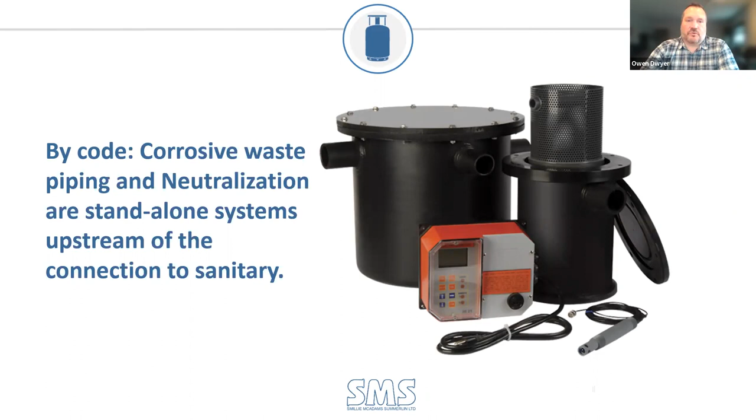So think of it as a system—a standalone system, upstream of the connections to the sanitary. The more people that are aware of this type of system, the better. And sometimes it comes down to educating the end users as well: you're not just putting anything down these sinks, because it's not going into the standard sanitary stream—there's an interceptor or a neutralizer before that.

So yeah, again, that's not necessarily dictated into code, but it's similar to a backflow—the manufacturer would likely recommend a strainer upstream of it. With this neutralizer, recommending essentially a strainer, but the interceptor upstream. Absolutely. And it's best practice is what it comes down to.

And the type of job matters—is it a high school, a university, or an industrial lab? If it's an industrial lab, maybe you're going to have less Tupperware dishwashing of the croutons in your salad left over in the sink, whereas you would see that in a high school or university, for example.

So the interceptor is not a code requirement, but it comes into play in a lot of these applications. On that note, I know time-wise we'll pause and take a look for any questions here. And while we're doing that, if you can stop sharing for a second, I'll show something.

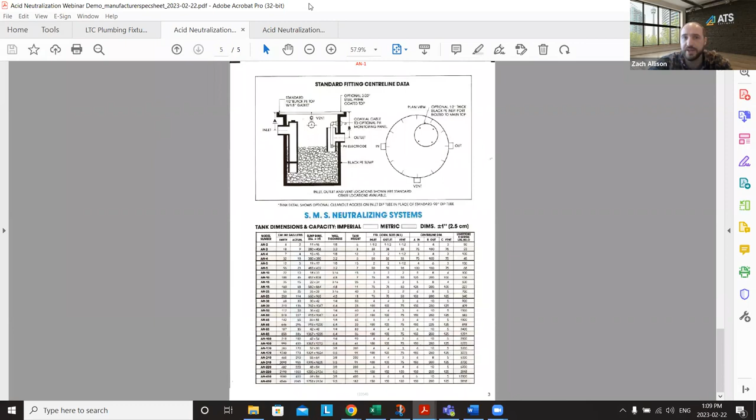The manufacturer spec sheet package gives you a nice title page, table of contents, and the product selected in the manufacturer spec sheets for all the products in your project. That first one, the submittal sheet, gives you our typical ATS submittal package, with marked off boxes of the options you've selected and a bit of a written description.

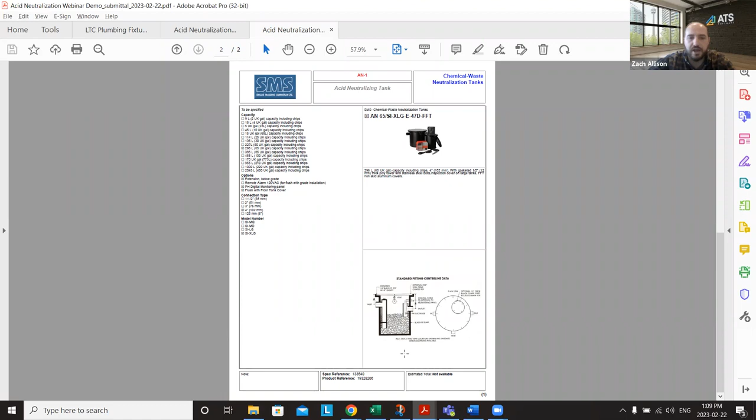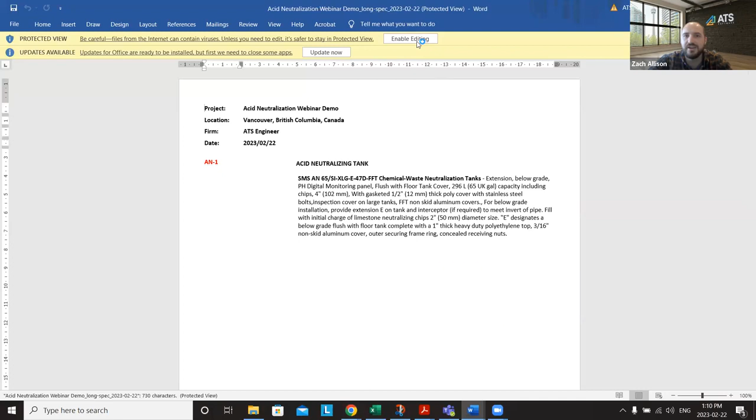The schedule gives you this handy fixture schedule in Excel that you could copy and paste into your CAD, or put into your larger schedule system if that's how you're going about it. There's also the CSI three-part spec, so you can get a more code-based three-part spec. I'll flip back here and download our long spec as well, so we can take a look at the difference in formatting.

One other handy feature I forgot to reference in my earlier pass through: our long spec now includes an option that was requested by several engineers to exclude page formatting. If we want to show the difference, you can see the formatting that's included in the document here. It's going to package that up and remove the tables and columns, so it's easier to copy into whatever format you're using internally at your office.

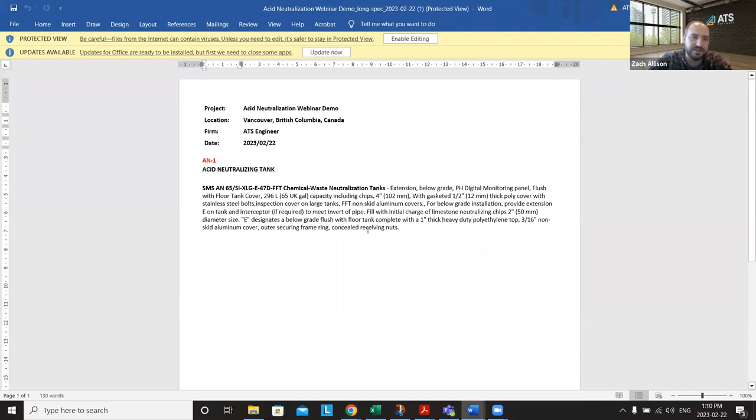So you can see the differentiation here. We've removed some of the formatting. It doesn't necessarily look as nice, but it's a little bit easier to copy and paste and pop into your written format. So that is the very quick version of the ATS spec demo.

Obviously we could go into a lot more detail, and even just on this individual topic there's a lot to cover and a lot of questions, so we're running a little long. We'll jump into questions after this. But if you have any specific questions and want a deeper dive on any particular applications, Owen and I are happy to jump on an in-person or virtual session to go over your particular questions and applications. I know we've done a handful where we walked through both alkaline and acidic effluents, sizing, and the more detailed options available in those engineered systems. So we could certainly do that.